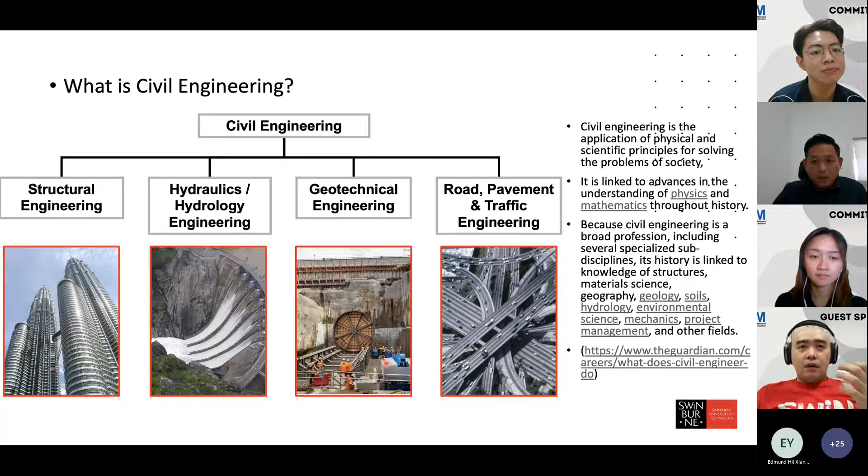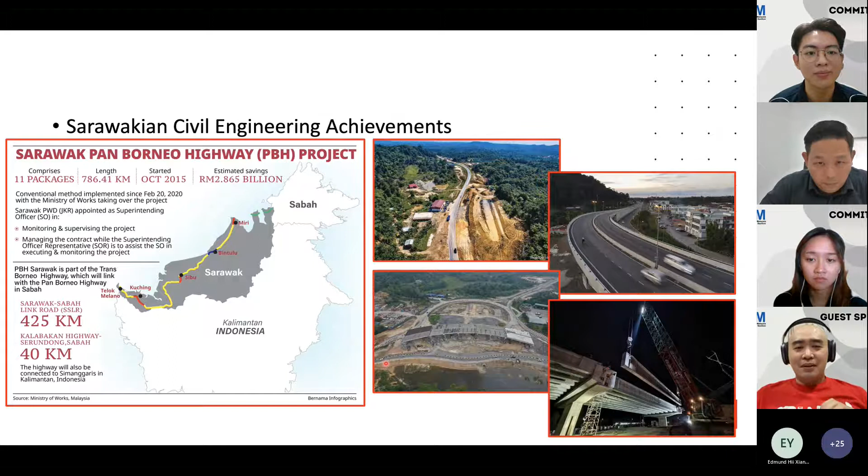So just to highlight some of the Malaysian civil engineering achievements, of course there's the KLCC Twin Towers, you've got KVMRT, Smart Tunnel, and of course KLIA. I'll just touch on a little bit of the Sarawakian civil engineering achievements, such as the Pan Borneo Highway, and of course the Kuching wastewater management system. There are many others.

All right, I'm just showing you what civil engineering in Malaysia looks like. Now, this is in general. Okay, this next few slides are not just talking about civil engineers, it talks about engineers in general.

So engineers can have many different pathways. You can be a design engineer in a consulting firm. Nowadays there are also project management consultants which hire a lot of engineers as well. You can also go into construction. And this third one, it's not an industry, but rather more of solution providers, so they can be suppliers, software vendors, and they will also need engineers. You can also work in the government or implementation agencies, or you could do what I do, go into education.

Okay, so as a consultant, what do you do? Well, consultants tend to be more on coming up with the design of civil engineering solutions, it's mostly on paper, doing a lot of the pre-construction planning. So how big are your piles going to be? How thick is your road layer going to be? What is the requirement for the subgrade? What is the alignment of the road going to be, both vertically and horizontally? So all this is on paper. You have to be able to put it on paper before you can construct.

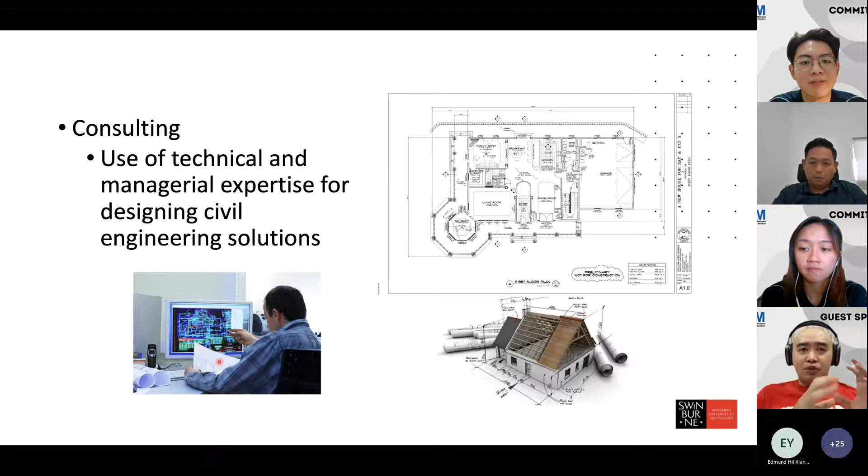There's an old saying when it comes to carpenters: you measure twice, you cut once. All right, so that's what consultants do, that planning, the pre-construction works. Then once that is done, we go into construction.

Okay, I'm talking about a conventional kind of engineering project delivery system. So when you go into construction, the contractor will usually have those drawings, and then they'll have to build based on those drawings. So if you think of it as Lego, you always have a manual, right? You have the materials given to you, you've got all these bricks of different shapes, different colors, but you need a manual to put it together. So the consultant puts together the manual.

The contractor puts together all of the resources and bundles them. You even package the bricks, your Lego bricks, into either different colors or different shapes, right? So that's what contractors do. But contractors more and more these days have to be sensitive to the environment. They have to be very sensitive to safety and quality of the construction.

This diaphragm wall will allow for the construction of a deep excavation, and in the background is an existing building. You can see that the construction is practically right next to it. So contractors need to be aware of the environment and the space they're working with. Even though there are a lot of developments in rural areas, there's still construction needed in built-up areas, and they present their own challenges because they're densely populated.

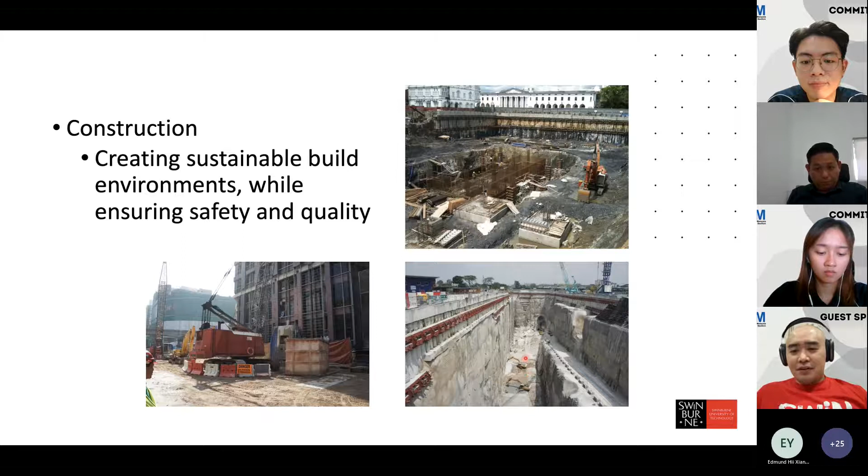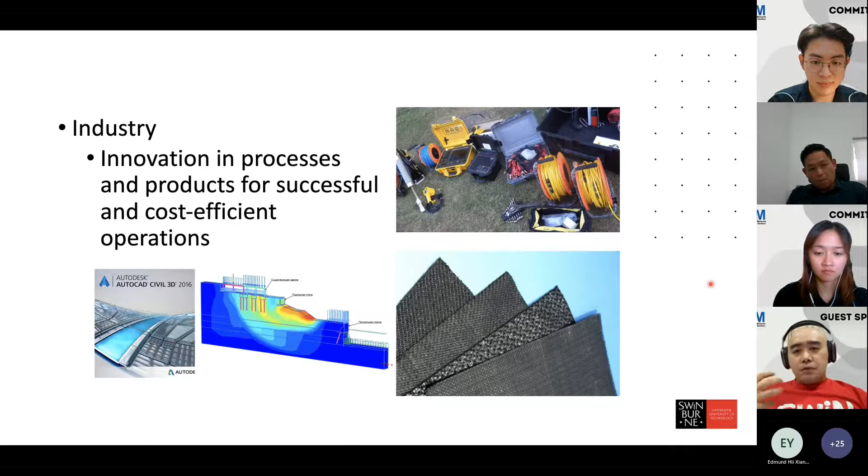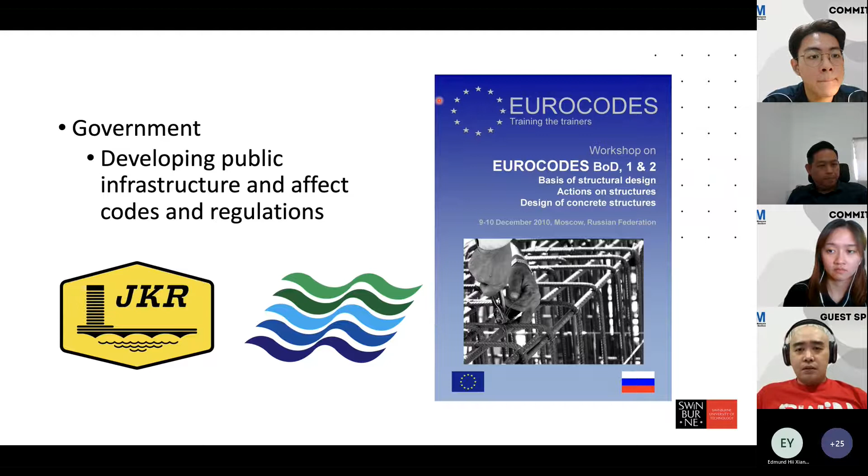And of course, education. Civil engineers - or engineers - don't just magically appear out of nowhere. In order to have an engineer in a consultancy, a contractor, a government department, or working as a vendor, we have to train them, we have to groom them. So that's where education comes in. Education is very much a part of engineering as well.

He'd always point to some of these buildings and say, 'You know what they do there? You look at this Ngee Ann City or Takashimaya. Do you know the building can move? The building can bend.' I'm like, cannot be. I found it so hard to appreciate that, so hard to visualize.

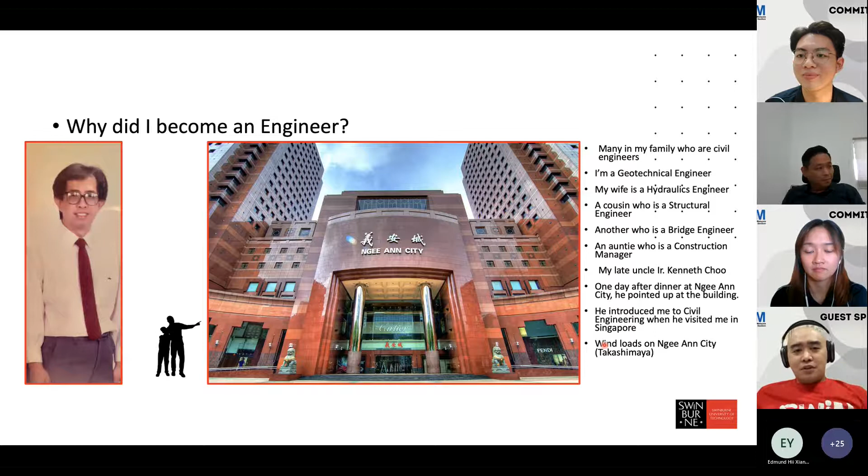So even though I came from a long line of engineers, you can see that we're all in civil engineering, but in different fields of civil engineering. We wear different hats as well. Some of us are in construction, working with contractors, some work in the uni, some work in consultancies.

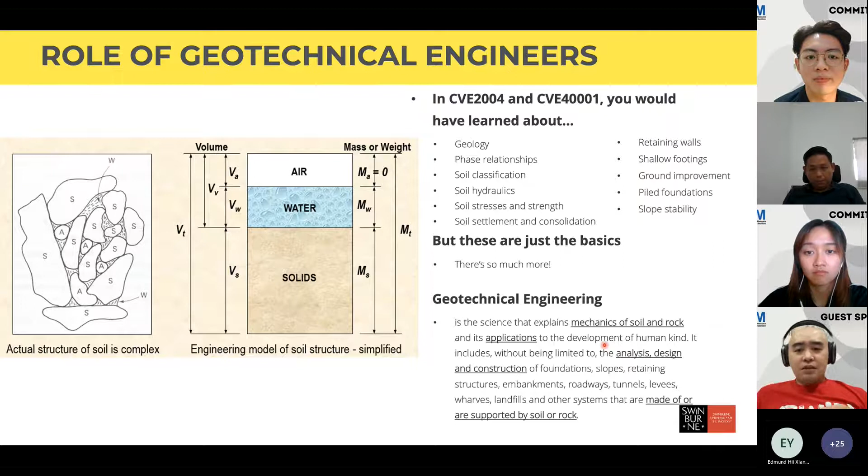But why did I choose geotechnical engineering? Now, I understand many of the participants today are in your second year, maybe third year, so you may not know about geomechanics yet, or geotechnical engineering. But let me just tell you, it's complicated. What you will learn, or what you have learned in undergrad, is just the start, just the basics. In fact, geotechnical engineers have a big role to play.

They have to consider information from many different sub-disciplines and perspectives - things like public policy, contract law, risk management, even mechanical engineering, construction. So the mechanics of it is only half. The science of it is only half of the role of a geotechnical engineer. The other half is very much to do with the environment, with people, with compliance with the law, and with what is practical.

There are many different kinds of projects, and some are led by geotechnical engineers - projects such as slope stability, whether it's cut slope or fill slope, slope strengthening, fill slope instability, reservoirs, dams, retaining structures, basement excavations. These are usually led by geotechnical engineers.

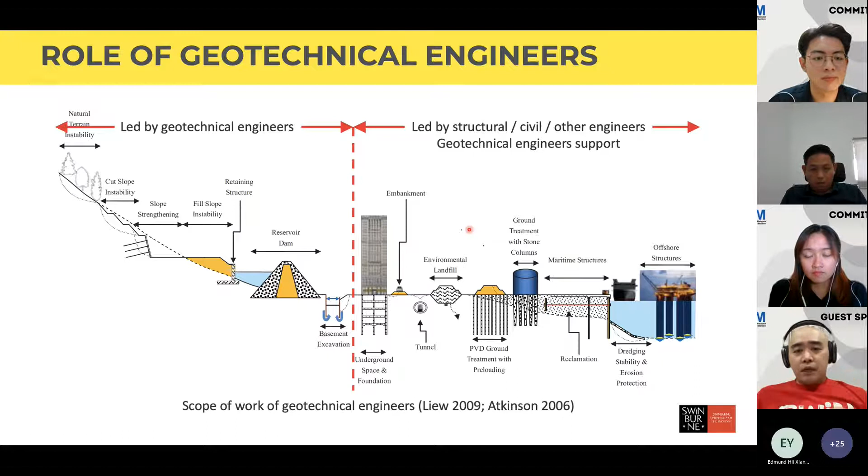There are other projects where geotechnical engineers provide support - they are led by structural engineers, led by civil engineers, but geotechnical engineers provide the support. So we work on many different types of projects, and every project is unique, with its own needs and requirements. The client may develop it together with a consulting engineer. Whether we are leading it or providing support, communication is so important.

I'll give you an example of this miscommunication or communication challenges. Geotechnical engineers work with structural engineers very frequently. Now, all of your buildings are structures, and they all sit on soil, so there is always that interface. But the problem is...

For structural engineers, they carry out their analysis using soil springs, meaning they represent the soil as springs. But if you use the term soil springs with geotechnical engineers, they'll be really offended, because we know that soils are not springs - they are non-linear, they don't behave that way. But that's how structural engineers model the behavior of the structures.

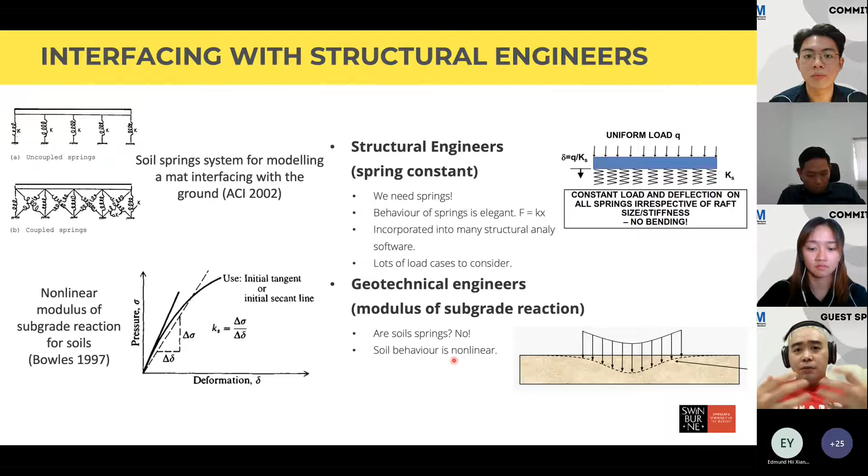So knowing how to interface, knowing how to work together is very important. Even though they need soil springs, find out from them what they're able to do so that it can best represent the needs of both the structural engineers and the geotechnical engineers. There is always some win-win situation.

Just take a guess. You can switch on your mic, you can type your answers, your guesses in the chat box. Do you think it's higher or lower than 1.5? No, if you're too shy, not to worry. Oh yeah, we've got a response. Someone says 2.5, okay.

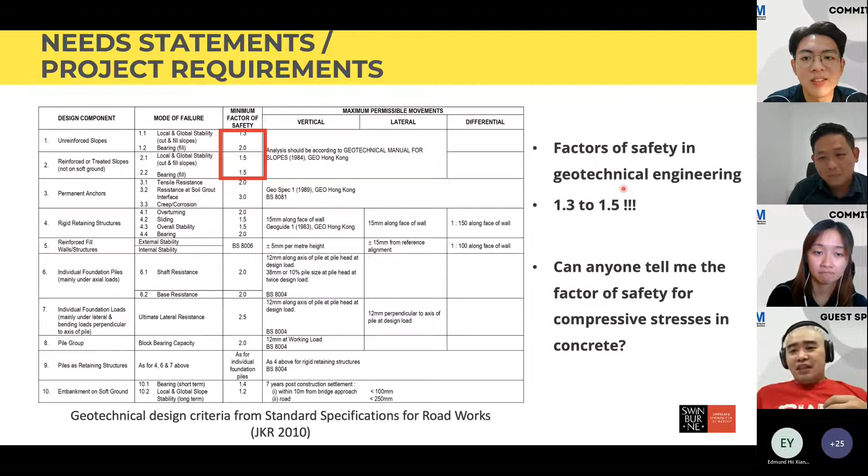It's not just that it's complicated, it's not just abstract, it's not just that it's a mix of science with art, it's not just that it's very challenging, and not just that it's very high risk. It's very difficult. So why did I choose geotechnical engineering?

Well, because I love a challenge, and I learned a lot, and because of the people that I met. And I think that it's important, and that's why when IEM-SSSS gave me this opportunity to present, I feel that this is a very important effort - a very important part of your growth, your realization into what you want to be. And that was why I became a geotechnical engineer.

It's because of the people I met. They showed me the challenges, but they also showed me the way to overcome the challenges. They planted the seed of interest, and then they showed me how to work together, and they guided me along the way.

So I have a lot of mentors, this is just one of them. He's my PhD supervisor, but he was really the first civil engineering lecturer I met. He's the reason I decided to pursue my PhD when I was in the first year of my degree.

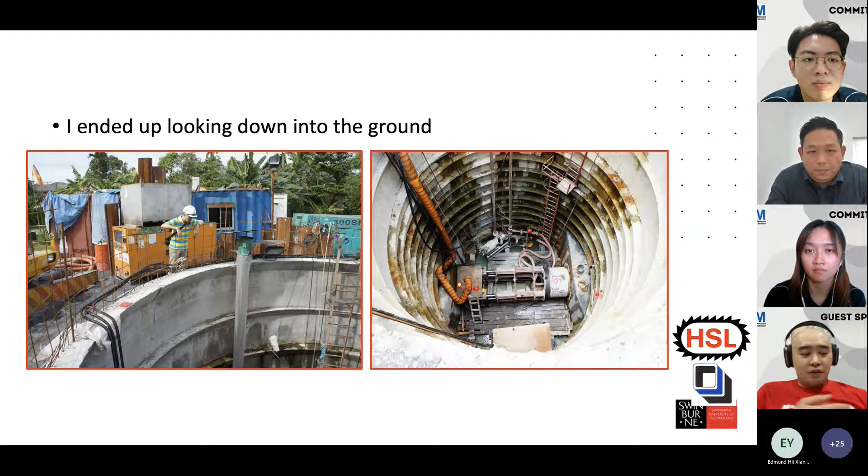So just to show you some of the pictures from this project. This is a photo of the microtunnel boring machine from Iseki that was used for this wastewater management system. Yeah, a picture of me when I had more hair on my head.

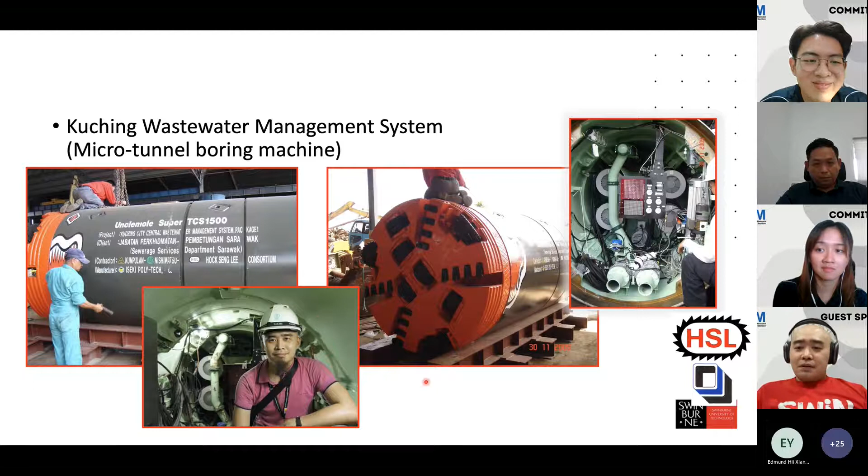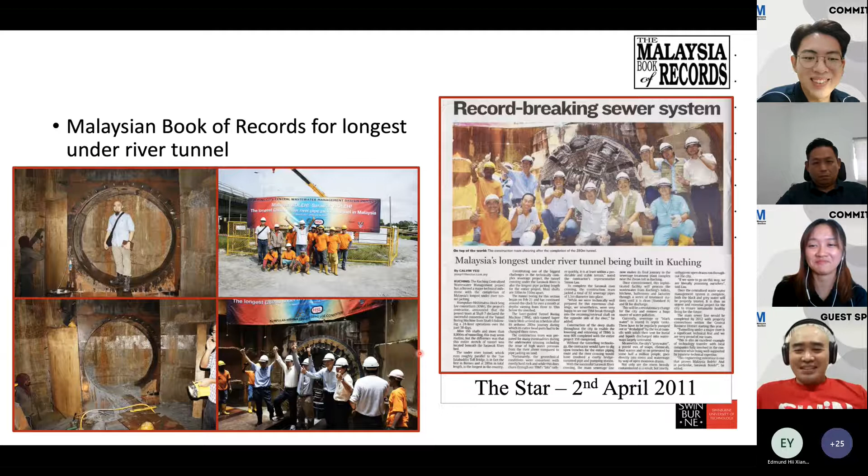So very happy to have been there to witness it. It's like witnessing the birth of a child. But this one is a mechanical steel baby.

So I was not involved in the Klang Valley MRT, but I was very fortunate to have gone to the site. I not only went to the Cochrane station, I went down into the excavation and into the tunnel. So I was one of the first passengers, first MRT passengers.

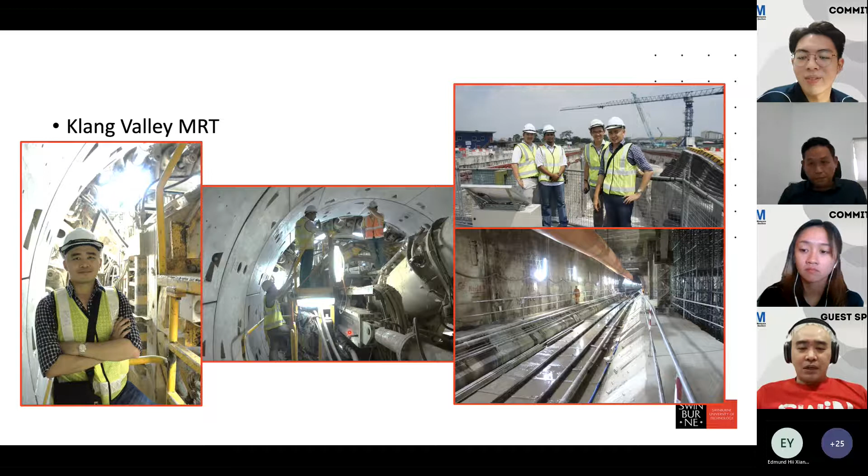But again, very fortunate to go right up to the tunnel boring machine to see how they construct the MRT tunnels. Since then, I've been involved in many different types of projects, a mix of consultancy and academia as well.

These are some pictures. In the top left is a photo of some of the slope rectification works I'm involved in. Some pictures also from bore piling works. This is interesting because if you see this bore piling, where they cut the pit to construct the bore pile, these are actually rocks, and you can see all of the dips, the joints, and the bedding planes.

In the bottom right corner, this is a riverbank that had failed due to an erosion problem. There's a weir there, and the river had piped around the weir. Our role in that was more of a checking engineer.

And there's some pictures from inside the tunnel of the Kuching wastewater management system. In case you didn't know, right now in Kuching when you flush your toilet, it goes straight into these sewer lines and is pumped to a centralized treatment plant. I was one of the first to visit these tunnels, and at the time nobody had flushed yet. I'm not so sure if I'll go back in there so soon.

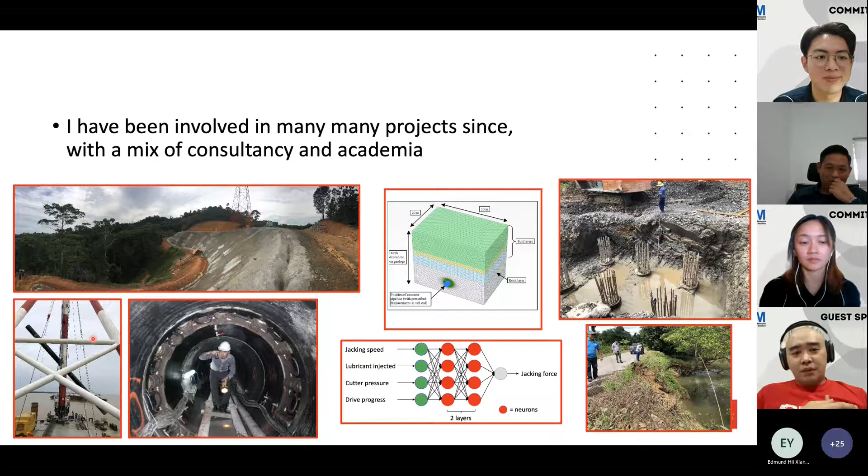And this picture in the bottom left corner is a photo from a piling barge of a project, a bridge for the foundation of a bridge on the coastal road network.

I'll show you some video of it, a time-lapse video of this pile. This is a steel pipe pile. This length is about 30 meters, but the whole pile that was going to be installed is about 90 meters long. So these are steel pipe piles, 1.2 meters in diameter, 90 meters long. Not too many of these kinds of projects around, so again, very much a privilege to have been involved to see this very first pile installed for that project.

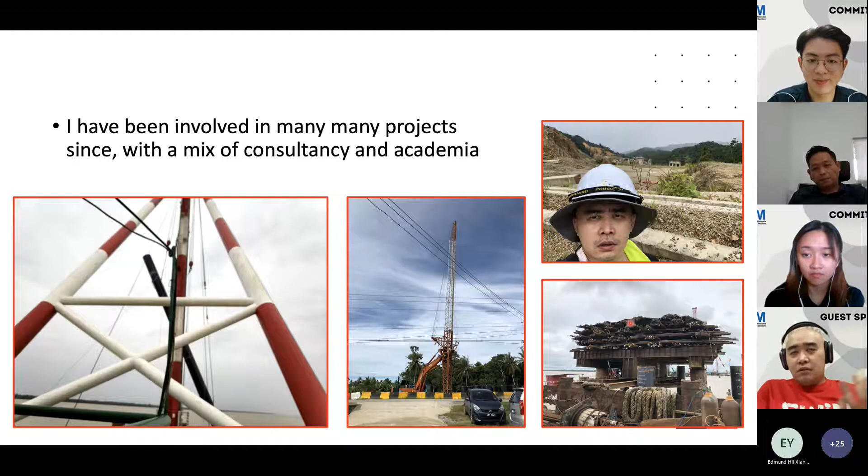And this in the bottom right is an image of a test, a pile load test for one of these piles. Again, quite a privilege, because you may know about MLTs, maintained load tests. They're nothing new - any kind of project using deep foundations, using piles, needs to have an MLT done to check on the performance of the pile.

But this was quite different. This was an instrumented pile, where we install strain gauges and load cells all along the pile, and as it is being loaded, we monitor the performance. Instrumentation of bored piles is not that uncommon, but this is a steel pipe pile, and to install strain gauges on a steel pipe pile is not that easy. In Malaysia, there are less than 5 documented cases that I am aware of. So again, quite a privilege to have been involved in one of these.

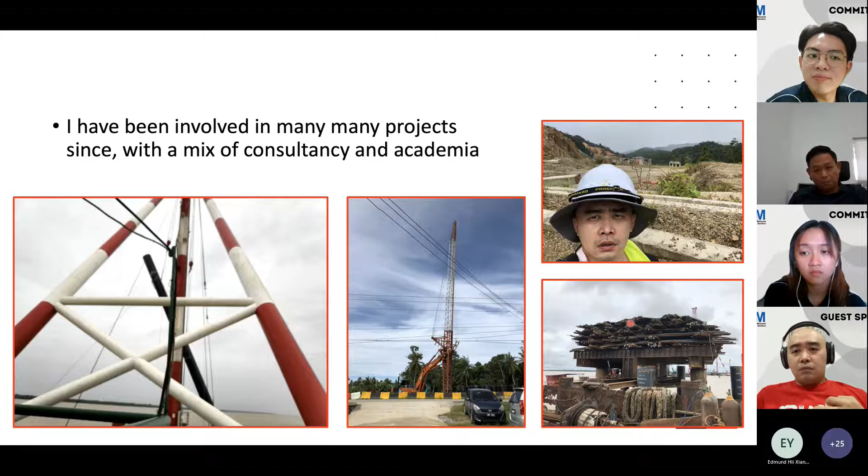All right, some other pictures. One thing about working in the industry is that things move very quickly, and construction projects move very fast - everything is due yesterday. So sometimes you will definitely come across questions that pop up, and it's difficult to come up with an answer, especially even as a geotechnical engineer. One of the skills you have to have is to be able to read through scientific papers to look for answers, but sometimes you still can't find them.

So one thing we observed, from my early RE days, is that the rocks under Kuching are very fractured. This is a core box, and these are fresh - we drill holes in the ground to collect samples of soil, and under the soil is usually rocks, which come out as cylindrical pieces. If the rock is intact, one piece, great, but most of the time it is not intact.

It's fractured, it's highly weathered, and it is not due to drilling. When we extract these rock cores, you drill for them, you core for them, and sometimes that can break the rocks. But those breakages usually run across the rock core. You can see these are not running across - these are at angles. So these are geological properties of the rocks.

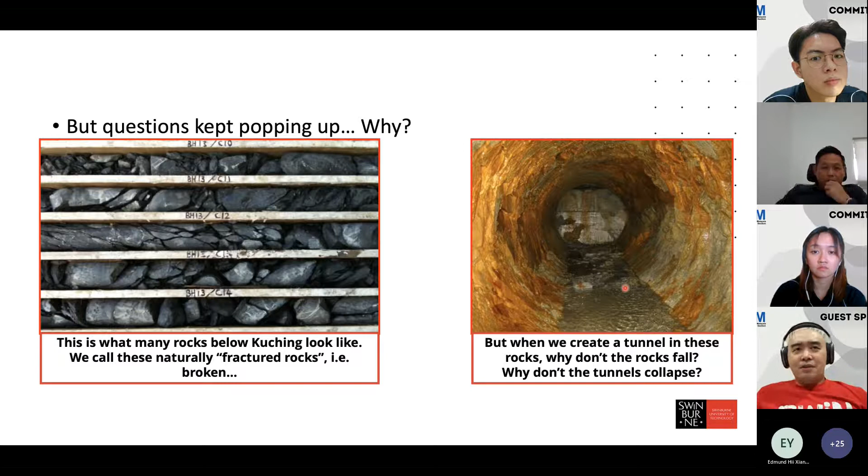So this was something that was in the back of my mind. Even my mentor was asking - it's strange, why, and it's nothing new. So that is also why I'm a researcher in geotechnical engineering.

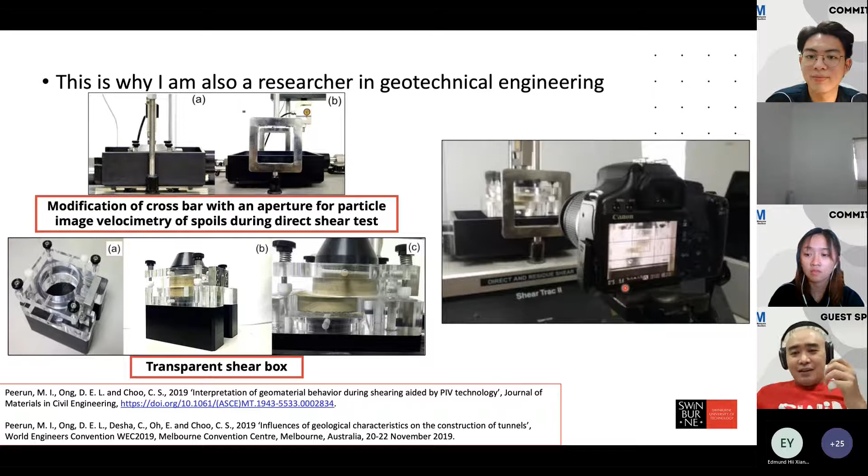It spurred a lot of research, and we ended up creating a transparent shear box. This is the direct shear test - not new, it's a very common soil test - but we fabricated a transparent one so that we can take videos and photos of the soil particles inside the box as the test is ongoing. Usually this shear box is made of brass, so you can't see the soil particles inside - you get results, but you can't see what's happening inside. So we went down to this level of looking at the particles, in the hopes of explaining what is happening here.

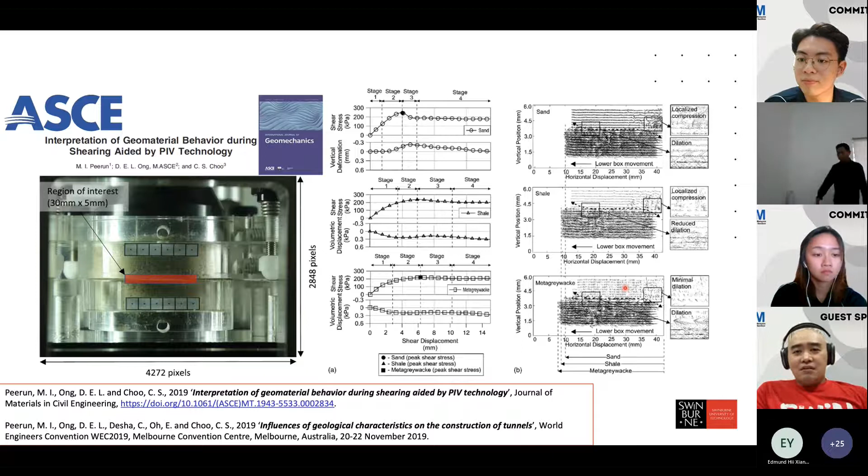So this is an accomplishment of ours. The work was so fundamental in explaining what we had seen with the fractured rocks, with the tunnel, that we managed to get it published in good journals and good conferences - Q1, Q2 kind of journals. This is one of the satisfactions I feel from this work, because you never think the international community will look at Kuching, but these are problems in Kuching that, with solutions coming from us in Swinburne Sarawak, we're proud to share. I think it makes Kuching a slightly bigger red dot. So these are some of the contributions.

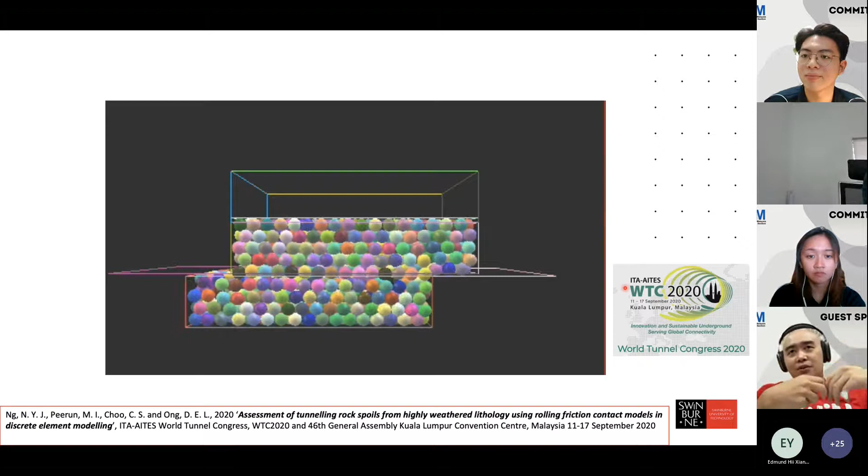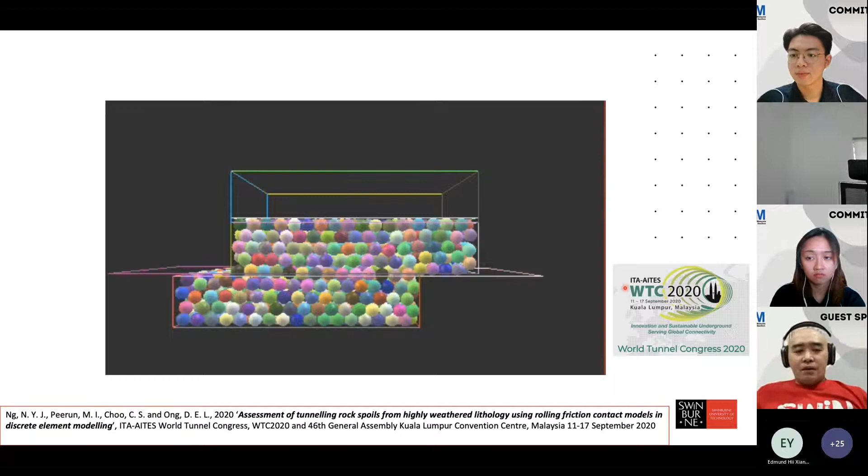Just to show you the next level of work we went to after this - discrete element modeling. You go into modeling the particles themselves, not using springs, elements, or beams - you model the particles themselves. So from here you can see how the particles move, how they slide over one another, how they roll over one another, how they dilate and compress. So again, we managed to present some of this.

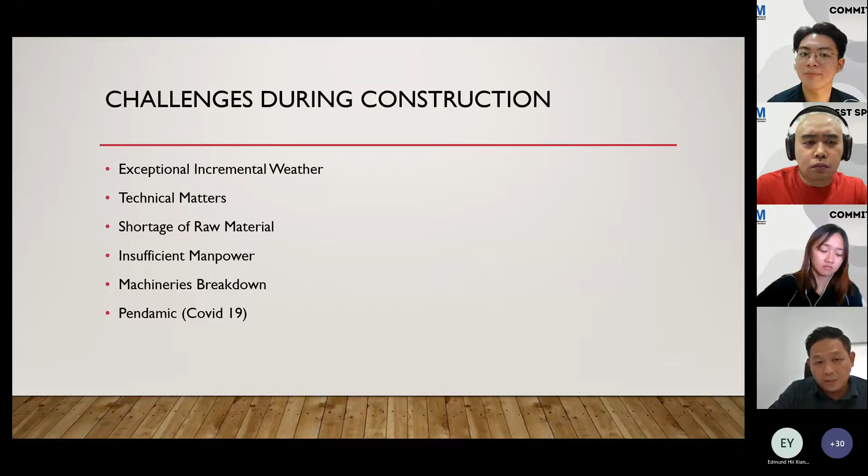Like what I mentioned in my very first place, in my past history I've actually completed more than 10 projects, but I'm not going to share too much on what I've completed previously, because it's very difficult for people. I don't think most of them are in a rural area. Some of them are in Singapore, and I did a wharf in Johor as well. And we did a connectivity road.

If you happen to know where Kapit is, we built a road in year 2016 to connect from Sibu town to Kapit. That is a staggering of about 50 kilometers of road, whereby we have two balanced cantilever bridges and a lot of small RC bridges. That is also something very challenging, whereby those are very rural areas. You might not have even electricity or water, or sometimes you don't even have a phone line.

So to be an engineer, especially a site engineer, sometimes it's quite a tough life. Okay, so today I'm going to share with you this existing ongoing Pan Borneo Highway, which we are expecting to complete by end of next year. I believe it's one of the largest projects that Sarawak is having right now. By completing that, hopefully everyone will have a very good highway, the very first highway road in Sarawak, to travel from Telok Melano up to Miri, and later on we will be able to go through from Limbang and Lawas that is coming on.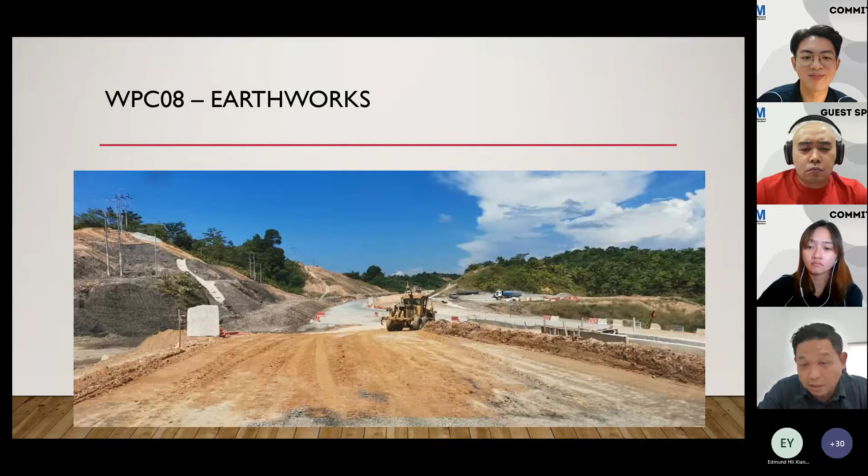These are some of the photos of earthwork activities that are ongoing on site right now. Earthwork excavations - we excavate by using an excavator and deliver by using lorries. On the right-hand side is a bulldozer doing some trimming works, and later on you will need a roller to do some compaction. You can see on the right-hand side there are some geotextile covered.

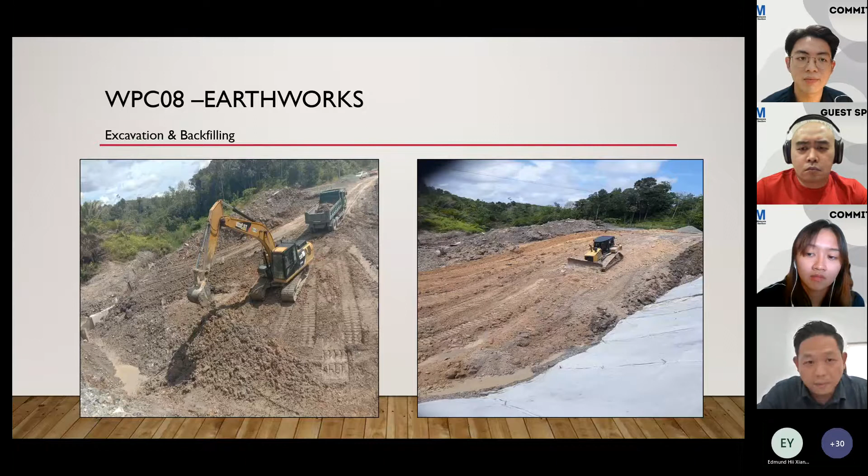The purpose of covering the geotextile here is to protect the slope from erosions. And this is also some photos of our excavator cutting on the slopes.

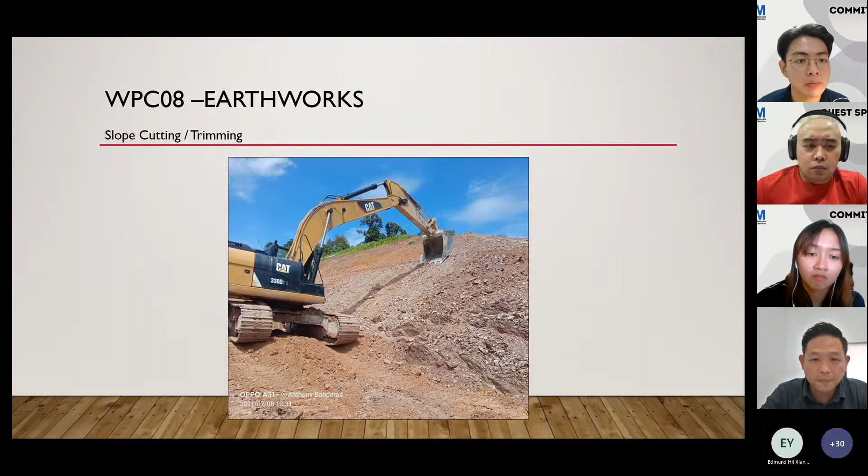And this is one about drainage work - this is a roadside drain. And this is about a culvert work.

Culvert work, most of the time, requires a very deep excavation. After you excavate, you have to perform the structure works for the culverts, and on the right-hand side is the completion of the culvert. Upon completion of the culverts, then we will have to backfill back all the embankment to reinstate the pavement works, so that all the passenger cars can actually ply on.

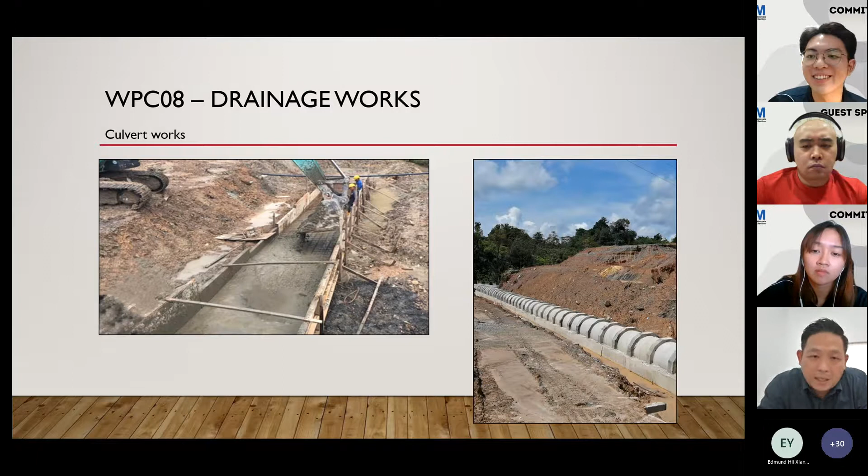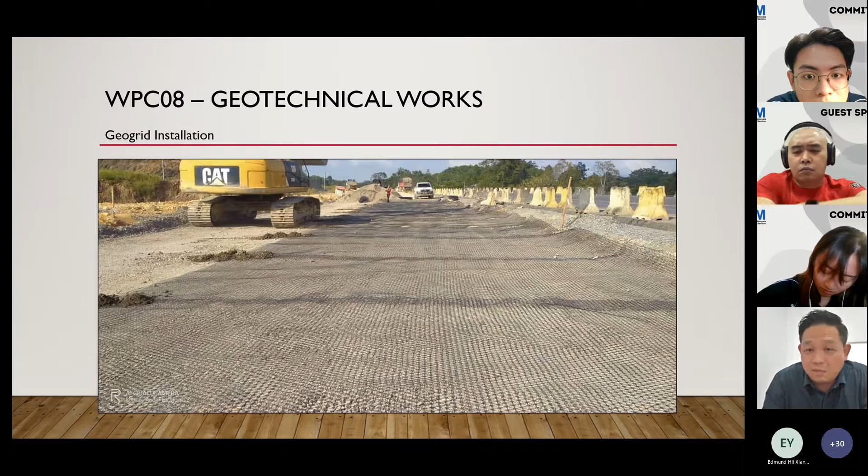I think just now Dr. Chu did mention something about geogrid, so this is a geogrid installation on site. This geogrid is installed on a sub-base layer, and we also have geogrid installed on the subgrade layer. So this is a kind of geotechnical reinforcement to increase certain tensile forces, which is designed by the engineer to prevent the filling embankment from failing. So this geogrid installation happened to be performed on site just recently here.

And this is also one of the geotechnical works key elements on our site. Like what I said, we have a lot of this area - we have a lot of soft ground. As you can see on the left-hand side, we are actually removing a lot of USM - we call that unsuitable material, which is a very soft clay that could potentially collapse or whatever if you do not perform this removal.

So we remove them - up to a certain depth we perform a certain geotechnical SI to look into how deep the excavation is required, up until the layer where removal is required. So upon removal we will have to fill back with some granular material - in our case mostly sand and some reinforcing geotextile, in order to prevent them from failing further from erosion. So these are some of the unsuitable material excavations that we are performing on site.

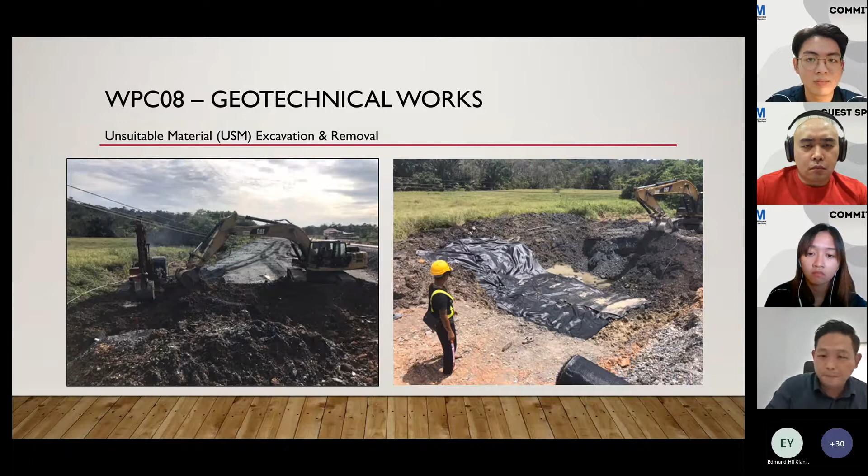Another geotechnical work I'm going to touch on here is slope protection. This is one slope protection currently being performed at the site, designed by the geotechnical engineers here. The purpose of this slope protection is because after the slope cutting, the geotechnical engineers found that the material on the earth is very weak. It doesn't pass certain criteria and has a very high potential for failure if not protected. So from there, the engineers decided to perform some slope protection.

So here we have soil nails, shotcrete, and horizontal drains, some weep holes, because some of the slope has water inside. They require certain horizontal drainage to get the water flowing. So these are some of the slope protections we are performing on site.

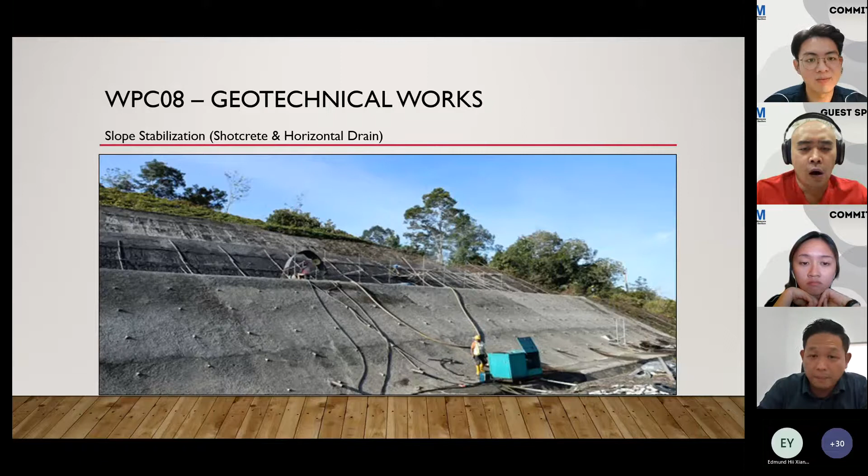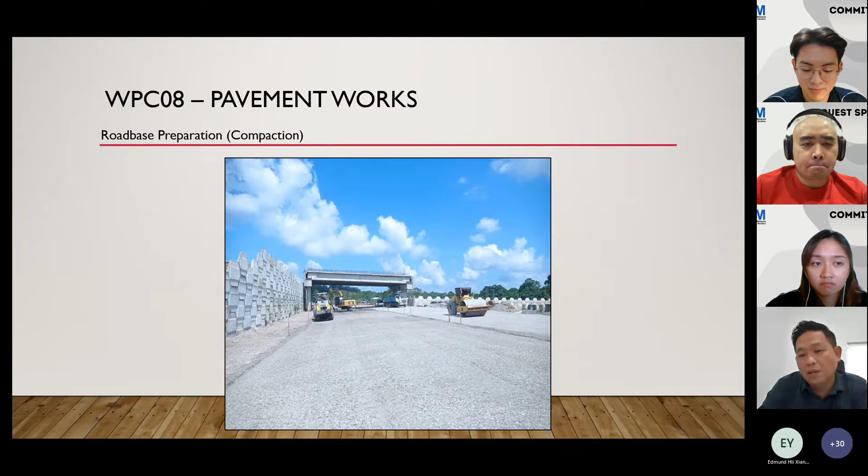This would be, okay, upon completion of these road-base constructions, and after inspection to make sure it passes all the testing and dipping and so on and so forth, we will be allowed to go for the next subsequent works, which will be to prime coat.

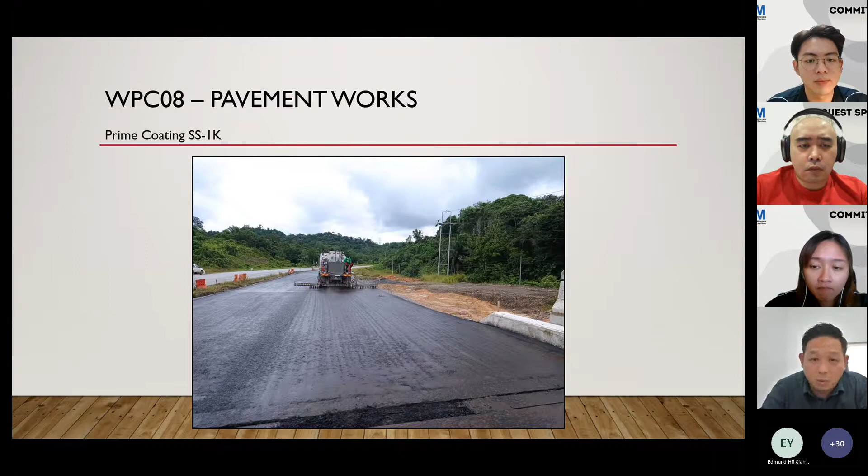What is prime coat here? Prime coating is actually a kind of bonding agent, bonding in between road base, road surfacing with the premix. It's something very sticky. You can see it's actually in a black foam oil type. So it is sprayed onto the road base before you can proceed to the next subsequent works, which is premixing works.

So upon spraying of that prime coat, we can only perform these premix activities on site. You can see these premix activities are performed by manpower and machinery. Bearing in mind, the premix is very hot - by the time it's reaching site, it could be up to 150 or 160 degrees Celsius. You can see some ashes flying, and it is something very hot.

So you might be the next engineer supervising next to it, and being an engineer, you have to go through this kind of life - it's quite challenging and also very exciting to manage. Being an engineer, sometimes what you get out of this life, other than your salary, is something we call satisfaction. Satisfaction not only from the contractor side, but also from the consultant side. It's something you'll be very proud of, when you design or construct something and it performs well - that satisfaction is what you have and deserve.

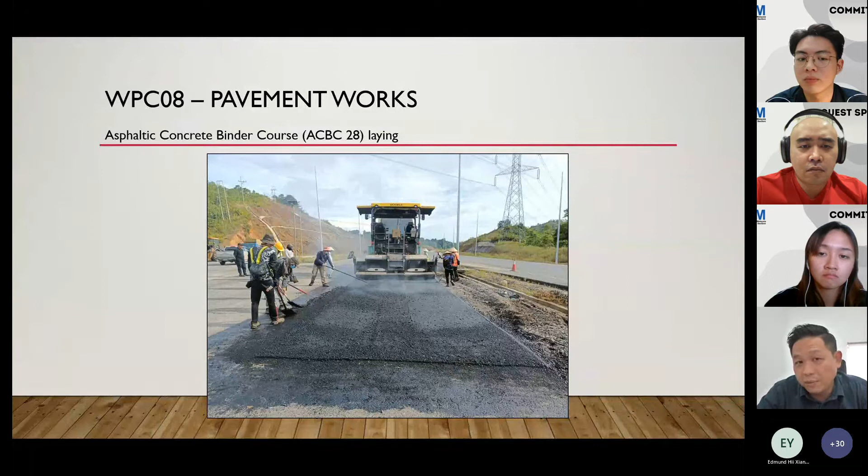Why is it called a tremie mix? We design it so that tremie concrete can be poured in a wet condition, because most of the time it's very difficult - imagine a borehole of maybe 40, 50 meters, some can go even deeper, up to 100 meters, 60, 70 meters, very very deep. Some of them are wet holes whereby you'll have water inside the hole, and you'll have to perform using a tremie concrete mix to concrete the pile.

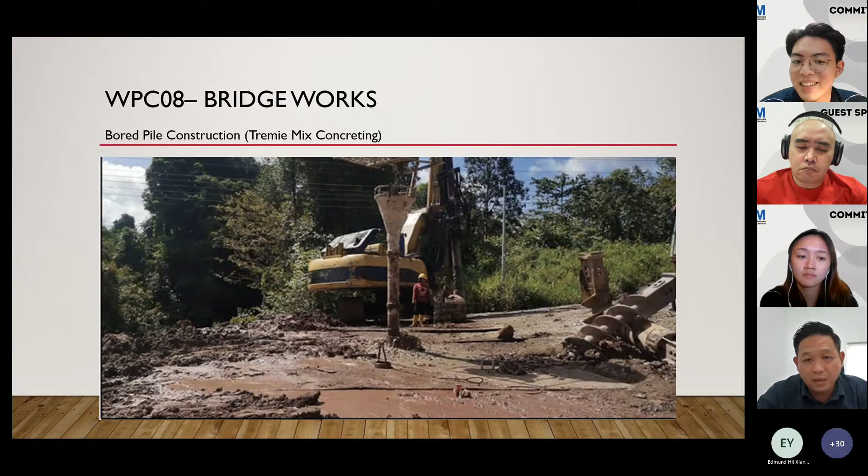The spacing are all very small. During the design stage, we designed this as engineers based on our structural and steel design knowledge, why we need so much rebar, and what spacing is required based on our analysis. This is where engineering professionalism comes in, and on site the workers have to perform and install them based on our design.

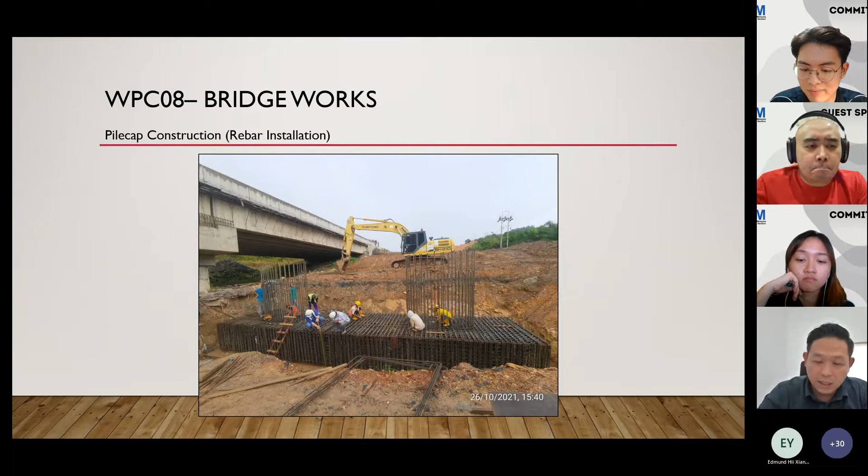I'm not too sure if during your syllabus you've designed pre-stressing work, like post-tensioning and pre-tensioning work. In order to have such a long span of girder, if we only design structures and rebars, we won't be able to achieve that. So we require a tensioning system, a pre-stressing system installed inside the beam, with a very high stressing force.

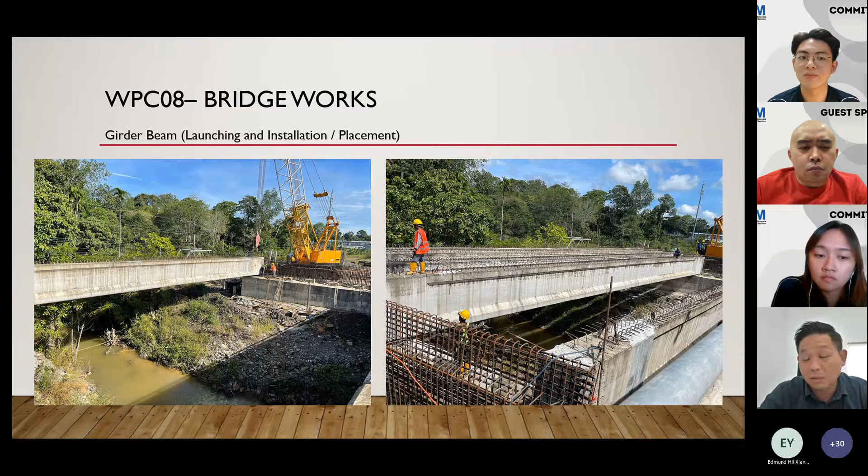That would be all for my talk today, and hopefully that is good enough to share with you all. Thank you once again. I think next will be our question and answer session.

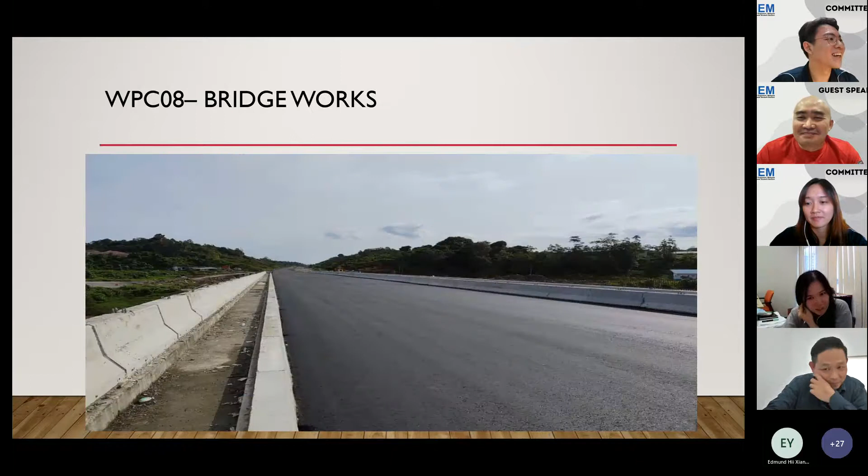Let me briefly introduce myself first. I'm Jia, and I graduated from UNIMAS with my degree and pursued my master's degree also at UNIMAS, but in the area of concrete technology, more on the research background. After I graduated with my master's, I adjust my camera, sorry, cannot see my face. Actually, I planned to become a lecturer at first, but in the end I joined as an engineer in consultancy.